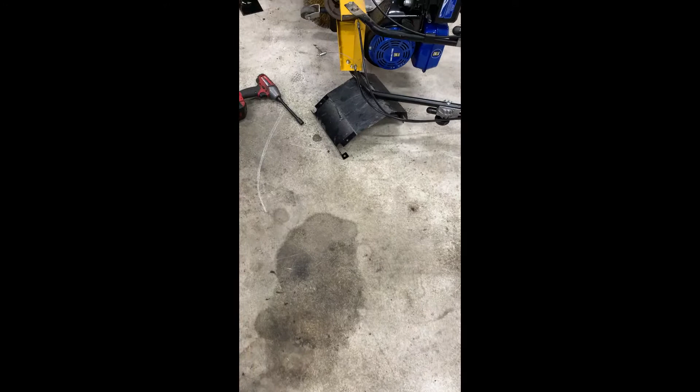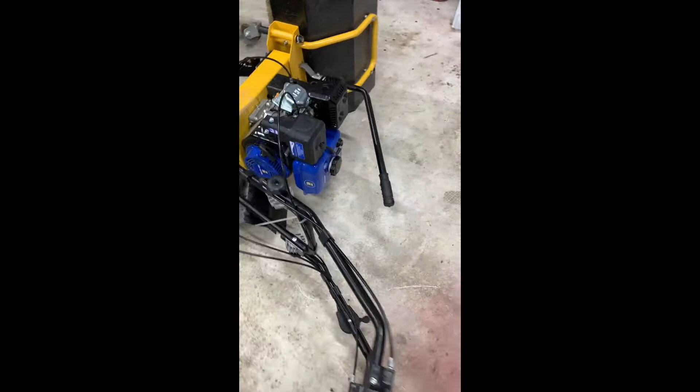Hello YouTubers. I just got a really good deal on this power sweeper. It was a scratch and dent sale thing at what we have here in Canada known as Princess Auto, pretty much the same as your Harbor Freights. I did a little digging and it looks like this exact sweeper has been repainted and rebadged under close to a dozen different names that I came across.

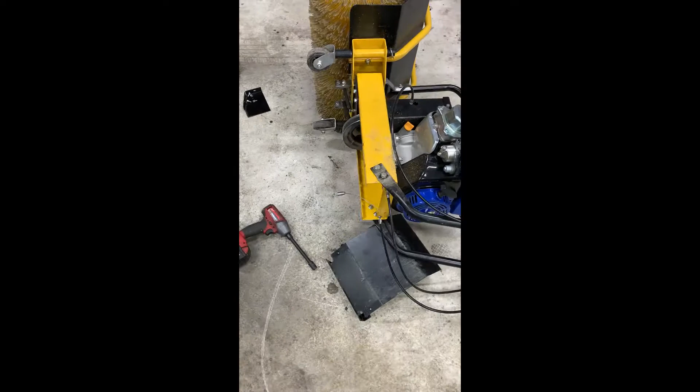Anyway, it runs great, but it had lost all of its drive. The brush still rotates and everything, but it had just lost its motion. I didn't really intend to record this, so I sort of started without you. But the transmission itself comes out really easily. There's just 4 bolts that hold it in there with nuts up on the top. Stick your wrench in the back, and zap zap, off she comes.

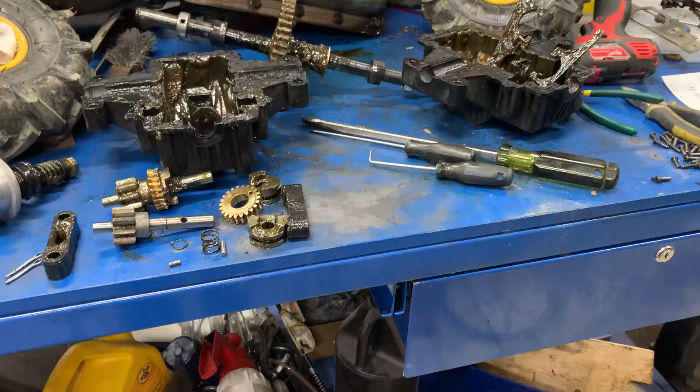Sorry, I did actually take the thing apart without you, but it's not terribly difficult. Pop the wheels off, lets it sit flush on your bench. There are 30 little screws, all identical, so you don't have to worry about mixing up the short ones and the long ones. There's some silicone that glues the case halves together, so a little bit of gentle prying and she'll all pop out. You take out the main shaft, and you're left with a bunch of bits and pieces.

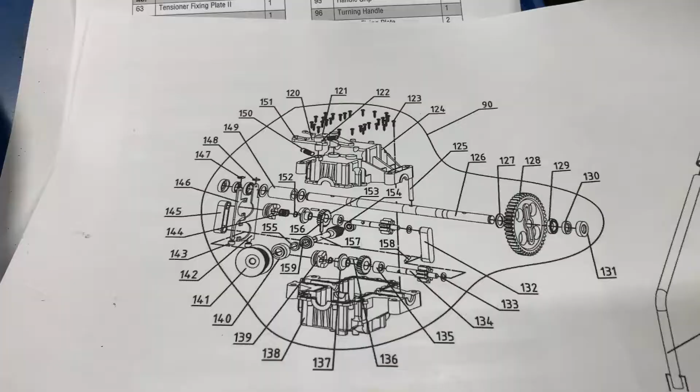I did manage to find this parts diagram online, which really did help. It doesn't show a heck of a lot, but at least it shows you roughly what you're up against.

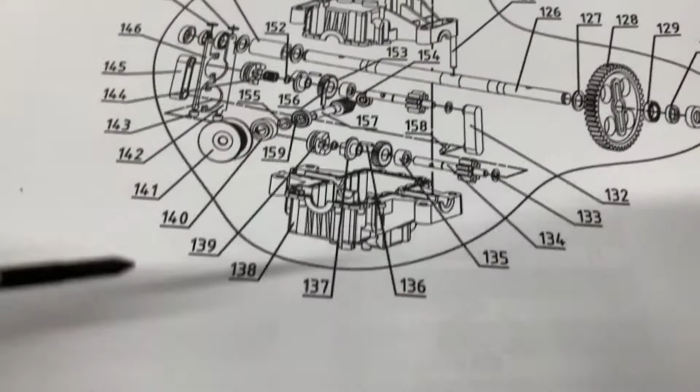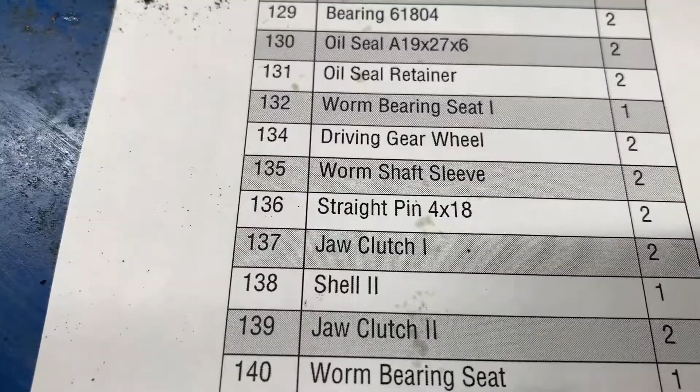Since this thing had neither forward nor reverse, I was kind of suspecting that there might be some shear pins somewhere inside the gear case that had done their job and sheared. So if you look, let's see now, where is it here? Number 136, right here, they call this out just as a basic pin, a straight pin, 4 by 18 millimeters, of course. They don't actually call it a shear pin, but it definitely is one.

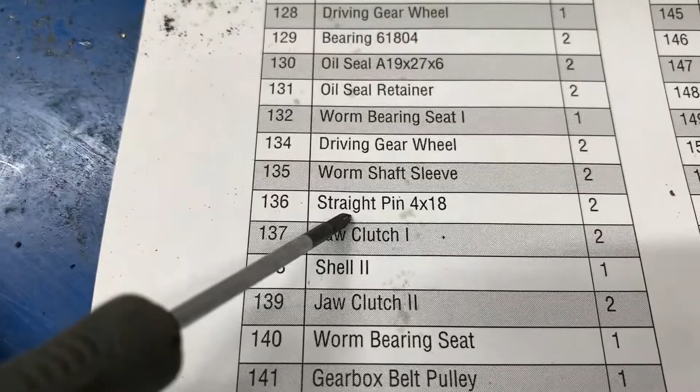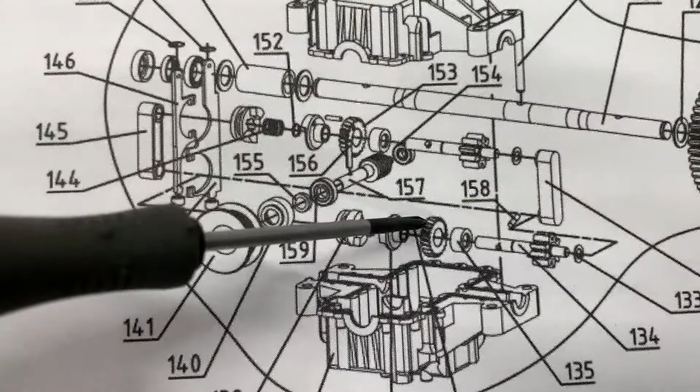So the shear pin connects this dog. This and this are 2 halves of the dog, just like dogs in a straight cut transmission. This piece here, half of the dog, via that pin on this shaft, connects to this gear here, which is this gear right here. And you can see there's a hole there, which is where the pin was. That's the other side of it.

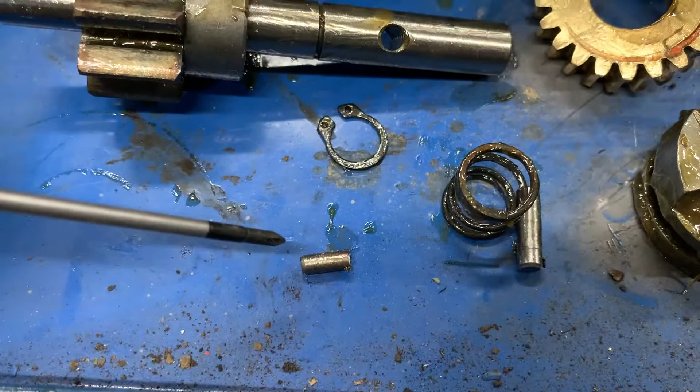That there is the broken off pin that I found, and it is broken off in both the forward and the reverse. So here's the dog, there's the hole, there's the pin. And here's the dreaded thing that we all hate that never works, these easy outs, but in this particular application, it worked like a hot damn. I just drilled out, I don't even know how far down I went, maybe half to 3/4 of the way through the pin, drifted in the easy out, and I literally grabbed it with my fingers and gave it a little wiggle, and it popped right out of the hole. So this is the one that's still assembled.

There's a cross pin here, which is sort of held in place by this spring. The spring's not particularly strong, so if you can pull the spring back with your hands and then just take a light little brass hammer and give that a quick tap, she'll come right out. Now let's take the pin out, take the spring off, and then you'll find this snap ring is way down in there, a real pain in the ass to get out, quite frankly. But anyway, you get the snap ring off, which then allows you to take this guy off, and then you will see the aforementioned pin, which connects Mr. Gear here to Mr. Dog.

So I don't have any of those pins, so we're gonna have to engage the lathe later, I think, and create 2 of these pins, which shouldn't be terribly difficult. I mean, come on, it's a straight chunk of metal. How hard can that be, right?

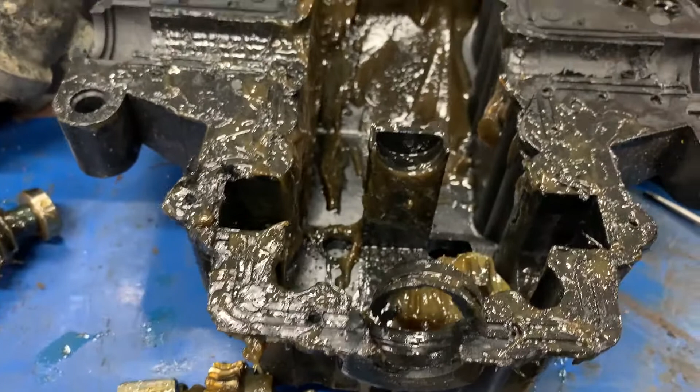Oh look, there it is, some of the silicone. So make sure you replace all the silicone. And come on, focus, you know. And yeah, slammer jammer all back together. Should be good to go.

Anyway, so hopefully that helped. And after this, I should have a perfectly good running sweeper. Anyway, that's it for now. See y'all later.